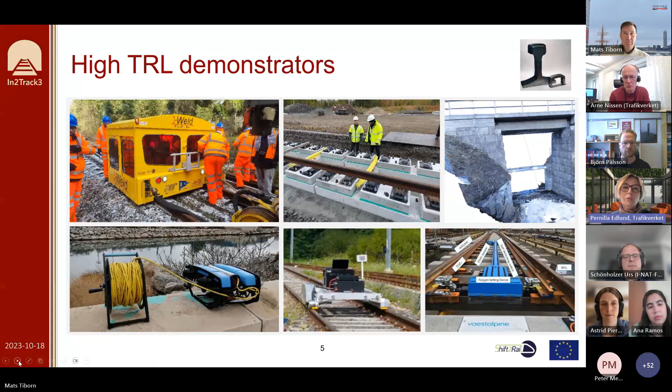This is just an illustration to show, and here are a few more of the demonstrators that we have. As I said, we have 30 of those at high TRL levels, which are very interesting to learn more about. If you want to learn more, you can join our final event on November 30th. It's a hybrid event, a whole day event, but divided into blocks. You will find the detailed program at in2track3.com, where you can also see the blocks themselves and the specific topics and speakers.

So you know that this is something that really interests me. Okay, I'll join between 11 and 12 or whatever. So very welcome to register and to participate in that event.

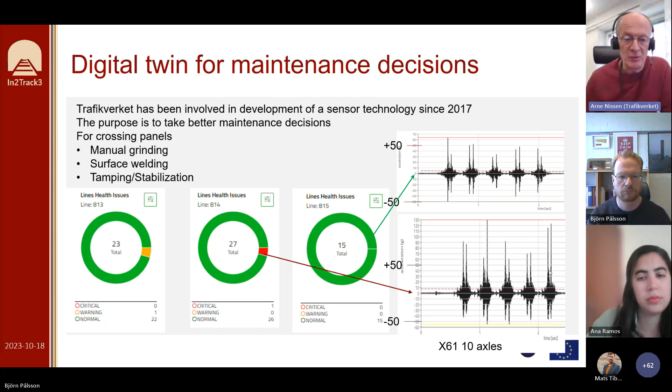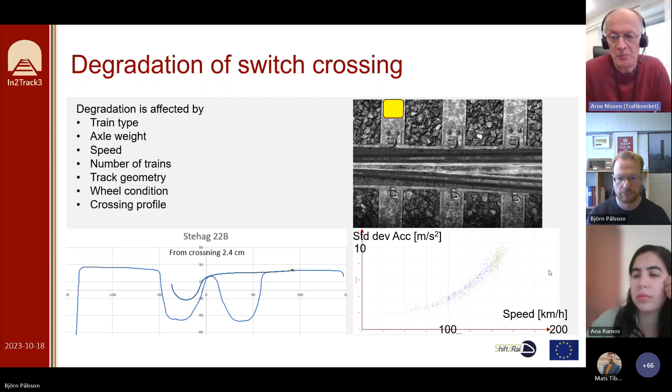Thank you very much, Arne. So at Chalmers University of Technology, we have been performing independent research on this instrumentation concept. We are using raw data from commercial sensors, but we do our own analysis using a digital twin concept. We're working with something we call model-based condition monitoring.

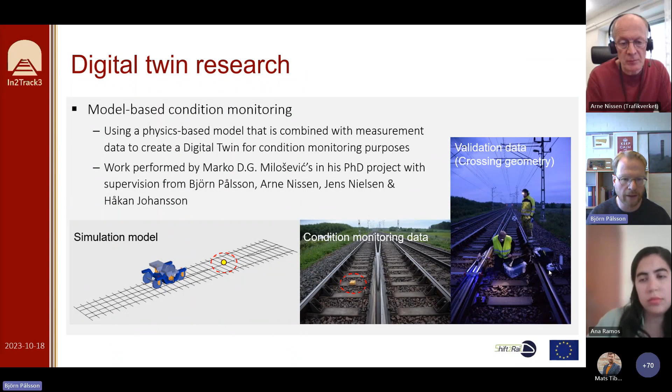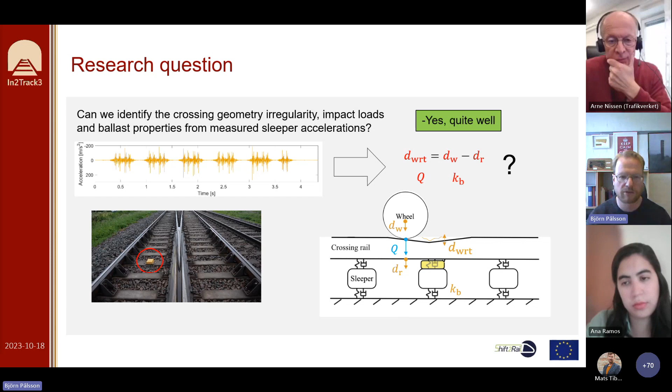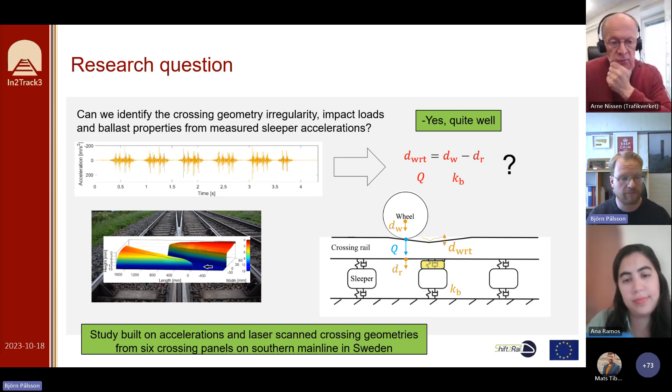To go into some more detail of the identification scheme itself, it's built on 6 steps. It starts with the measurement of the sleeper accelerations as shown before. Then Marko has developed a method for frequency domain integration, to integrate the accelerations twice into sleeper displacements. He chose this frequency domain integration because it showed to be much more robust than the typical impulse response filters.

Once we know the sleeper displacement, we can calibrate the ballast stiffness in the multi-body simulation model, and we have then identified the ballast stiffness at the particular crossing panel.

Using this calibrated model where we know the track properties, we assume that the superstructure has fairly nominal properties, so we don't expect the pad stiffnesses or sleeper and crossing stiffnesses to change much over time.

It's predominantly the ballast stiffness that has local variations. So with that assumption, we can perform an inverse load identification using a Green's function approach.

So we essentially take the sensor response and compute the wheel rail contact forces from the structural response. Knowing the forces, we can estimate the wheel and rail displacement and also then their relative displacement.

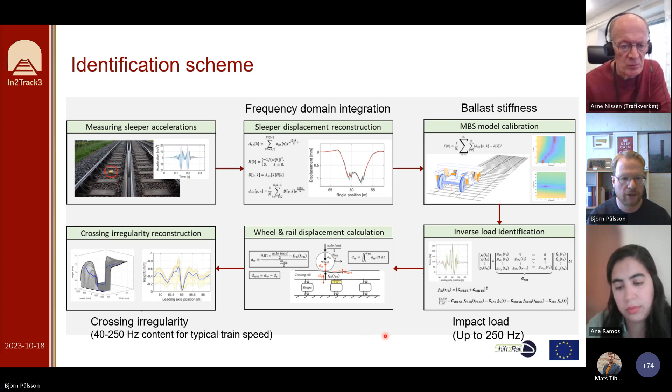So here is just an example of the ballast property identification for these 6 crossing panels. Marco has calibrated the ballast properties under the crossing, and we can do this independently of the crossing geometry.

So we are looking at the low pass filtered frequency and the quasi-static response, so to speak. We don't need to know the actual status of the crossing geometry in order to do this. So the result is independent of the quality of the crossing geometry.

So we have a parameterization of the ballast stiffness underneath the crossing transition, and here are just 6 examples of identified ballast stiffnesses. We see that for 5 of the crossing panels, we have an identified stiffness. But for the 6th, the stiffness is essentially 0, which would then indicate a voided sleeper.

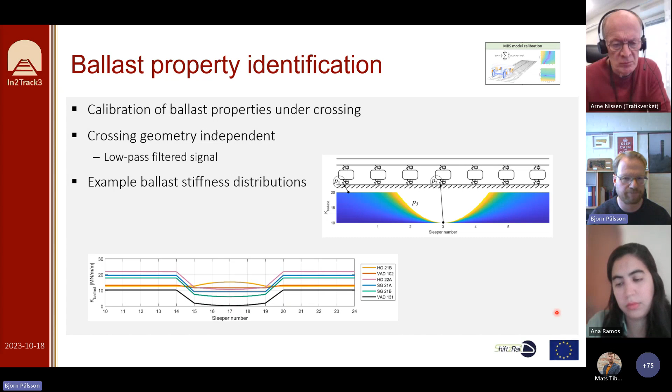And in this case, we had a sleeper displacement of around 6 millimeters, so it should definitely be voided. So that's the ballast stiffness identification.

And then we go further to look at the force and crossing irregularity identification. So here I have a number of figures. In the top row, we see results for identified responses from sleeper accelerations for a sample of axle passages.

So it's 48 in this case, I think. And below, we have simulated responses from where we have implemented these scanned crossing geometries and calibrated the ballast properties. And here we have used 20 different wheel profiles.

So as we don't know what wheel profiles are passing the actual sensor, we compare on a sort of sample basis. And then the responses we are looking at are the sleeper displacement for a bogie passage.

And it's the wheel rail contact force and the crossing dip or irregularity for the leading axle. And as we can see, the response is very good for the sleeper displacement.

It's more variable naturally for the wheel rail contact force and for the crossing dip. But if we look at the overall trend as identified here with the dominant mode in a singular value decomposition,

it's not so, the method is not so important, that we have identified sort of the dominant trend in all these repeated signals. We can see that there's quite a good agreement.

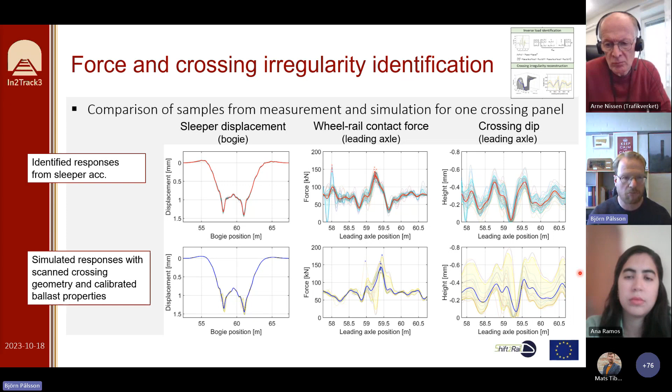But if we look down on all 6 of the crossing panels, we think that there is overall good agreement, but there is more variability for some crossing panels than others.

And the reason for that, we think, is that we have both uncertainty due to the wheel profile samples. We don't know exactly what wheel profiles are passing, and also the length of the scanned crossings.

So we only have a few meters of scan, which means that we don't know the full excitation in the real crossing panel.

So one would hope that the measurements would give the true answer, and partly it does, but without getting even more field data and a more detailed description of the actual measurement location, it's difficult to make

a strict comparison. But yeah, what I just wanted to highlight are 2 examples of a better crossing geometry and a worse crossing geometry.

So if we look at this crossing geometry, for example, Vad 102, and we can see in the green dashed framed figure here, we see this crossing irregularity dip or irregularity as

a wheel rolls over the crossing. So this is the vertical trajectory of the wheel as it rolls over, and we can see that it doesn't have a very large amplitude.

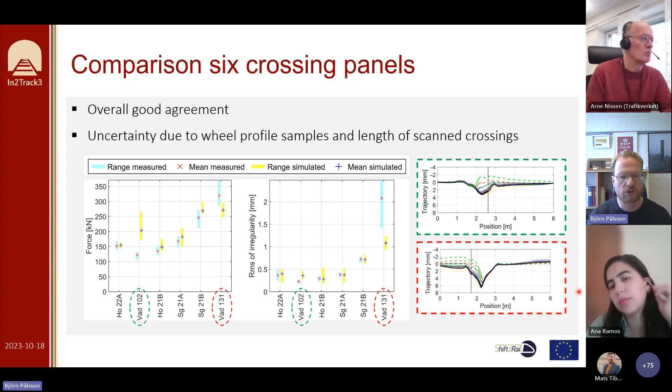So that was it in terms of the digital twin and condition monitoring. I wanted to give one slide on another thing we've been working on in In2Track3, the so-called whole system model. It's a simulation scheme that accounts for the coupling between different damage mechanisms, so we can make a holistic assessment of a crossing panel design and see how design changes influence different damage modes, and estimate the damage evolution of a crossing panel over time.

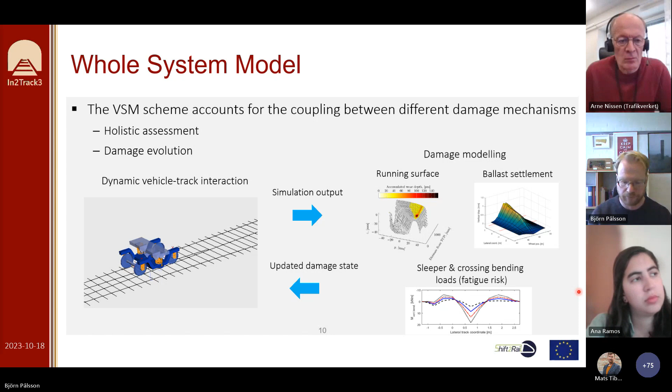So conclusions in terms of condition monitoring: we have demonstrated a model-based, or digital twin, crossing panel condition monitoring scheme to identify the ballast and crossing geometry conditions. We've shown that it's possible to identify with some accuracy the ballast stiffness, the wheel-rail contact forces, and the crossing irregularity dip in a bandpass filtered region.

In terms of commercial interest, I know there's implementation interest from commercial actors, especially for the displacement reconstruction algorithm. Some of the results here are yet to be published, so we have to see how much interest there is from that.

Also in terms of practical implementation, we want to stress that these models for the different ballast properties can be pre-computed for a computationally efficient implementation. So it's more about picking the model with the right ballast properties in order to perform the load and irregularity identification. It should be possible to do this online.

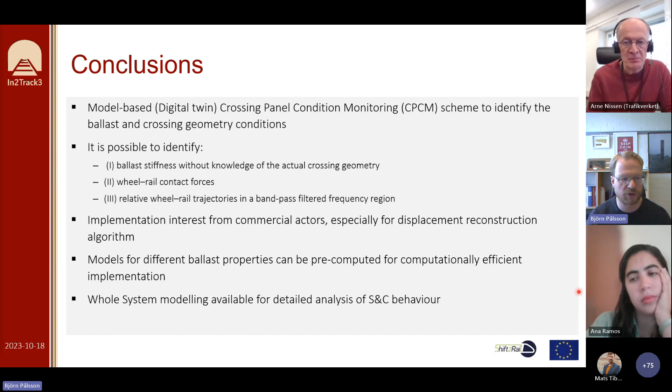I just wanted to say we have this whole system modeling scheme as well. As for publications, I will put them in the chat. Then I leave the word to Arne.

Yes, I'll take a few minutes. When we work as a manager for the maintenance contracts, having outsourced all the maintenance, it is a challenge to know when to do things and how we should be able to control what is done.

Today, very much is done on inspection, or that we get faults in the track geometry. What I see is that the visual inspection or the track geometry does not give the information I want in order to do good preventive maintenance. Then we can ask the question, is this the right method?

Should we put out more sensors? My view is we could do the same thing with trains that measure the acceleration, but it's even more difficult than what we have started. So by learning from one method, we can implement other methods to gain the same information.

What we actually want is to take decisions much earlier, because today we decide what to do within a frame of 2 or 3 months. It should be possible to at least have the knowledge 6 months before. So I want to head for more proactive decisions, which means the planning horizon for maintenance can increase.

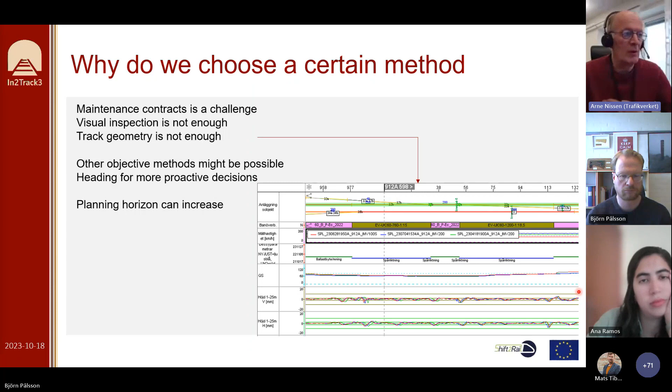Next picture, please. Going back to what we intentionally wanted was to divide the different maintenance actions depending on what the signal says, not just green, yellow, and red. I think Björn has shown that we can be more precise about what maintenance is needed. I talk about failure modes as a general term — if we can identify the failure mode, we can also instruct what type of maintenance is needed.

And the last thing is, when we are done with the maintenance, it should be possible for us to see that the condition is good again, so we can check this maintenance did the work we wanted. So that's all for me. Thank you.

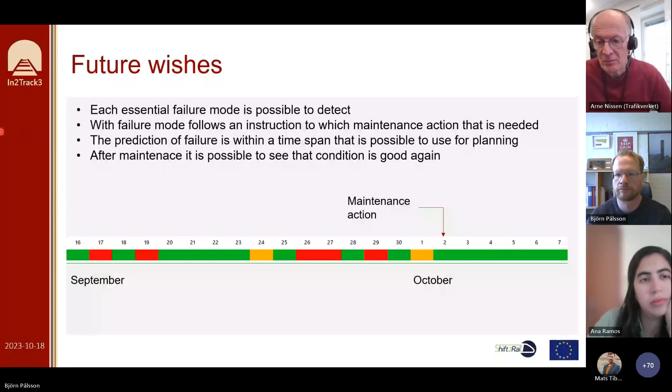Thank you very much, Björn and Arne. Actually, could we take one question that I see in the chat right now? What would be the value of sensor and data fusion from a large number of onboard sensors and accelerometers?

We have a project called MAI within Trafikverket that will take information from accelerometers on board trains. It has not been suited for turnouts, but we will use that information and see if we can succeed. That's actually what I wanted to say — it's possible to measure this from the train.

I think so. Okay, so thank you very much. And if you have more questions for Björn and Arne, please ask them in the chat, and they will try to answer as well as possible there, or guide you further to read if they have information elsewhere.

So next up is the track design and track maintenance guidelines to reduce curve squeal, with Astrid Piringer from Chalmers University of Technology and Urs Schönholzer at the Swiss Infrastructure Manager SBB. Welcome. Good afternoon, I hope you can hear me.

My name is Astrid Piringer, and I'm working at Applied Acoustics at Chalmers University of Technology in Sweden. I would like to present the work that we did about curve squeal in In2Track3. The long-term goal of this work is to provide guidelines for track design and track maintenance to reduce curve squeal.

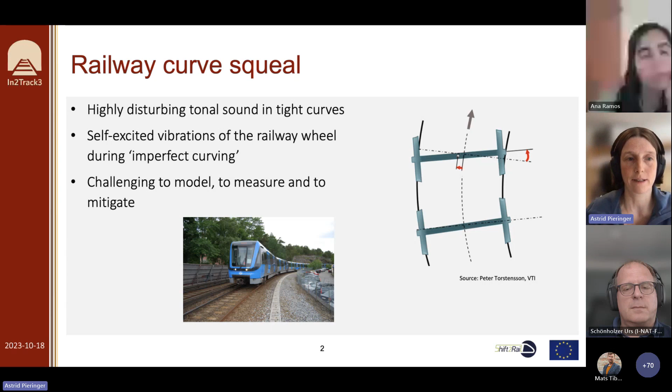Squeal is in many ways challenging. It's challenging to model because it's nonlinear and transient and depends on many different parameters. It's also challenging to measure because it appears rather chaotic than deterministic, and depends on environmental variables such as temperature and humidity that change from day to day or even hour to hour. It's also challenging to mitigate because measures work in one situation but not in another. So there's a lot we still don't know about curve squeal.

So the agenda of my contribution is: I will shortly present our model and how we improved it during In2Track3. Then I will talk about the influence of rail grinding on curve squeal, which actually showed to have a significant influence. And at the end I will present some first results about the influence of rail pad stiffness.

It includes a flexible wheel model, a waveguide finite element model of the rail that is either continuously or discretely supported, and a detailed contact model based on Kalker's variational method. We use a Green's function approach to solve these three models together, which leads to high computational efficiency.

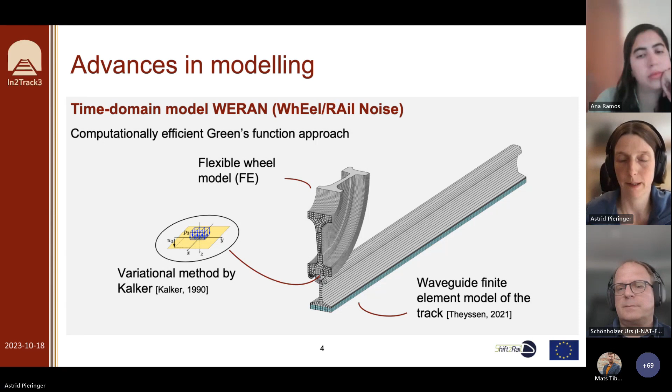Then in In2Track3, we extended this model to transient curving. Previously we could only consider quasi-static curving, but now we can consider that the contact position changes during curving, and also a varying creepage, which is the sliding velocity normalized by the rolling velocity, and other varying parameters such as the friction coefficient. I would like to show one result from such a simulation, which is a purely theoretical result, but it still gives some insight into the phenomenon of squeal.

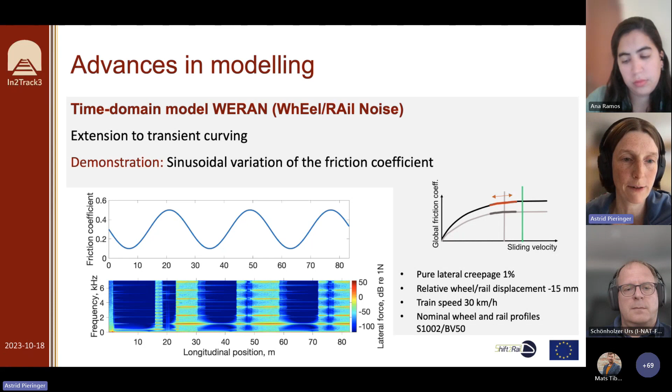What we've also done in In2Track3 is combine our model for high frequency wheel-rail interaction with a model for low frequency vehicle track interaction, using the commercial software Simpack. We first used Simpack to calculate the low frequency vehicle track interaction for a certain vehicle configuration, track geometry, and train speed. This gives us the time series of contact positions and creepages, which we then use in WERAN to get the time series of contact forces and wheel and rail displacements. We could also calculate the sound pressure next to the track, but we haven't done this in this project.

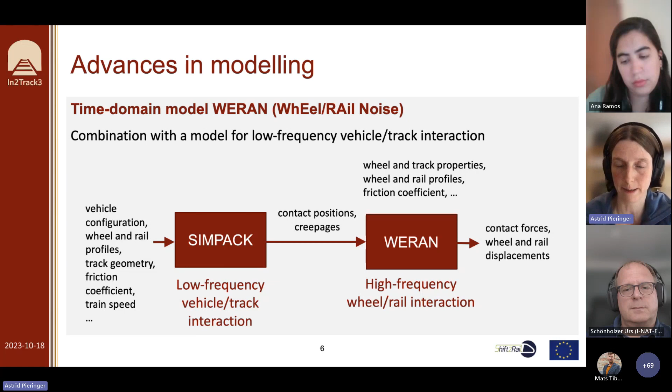Okay, that was the model. Now I will move on to the influence of rail grinding. There I would like to present some results from measurements, which are actually from outside In2Track3, from a national project about curve squeal.

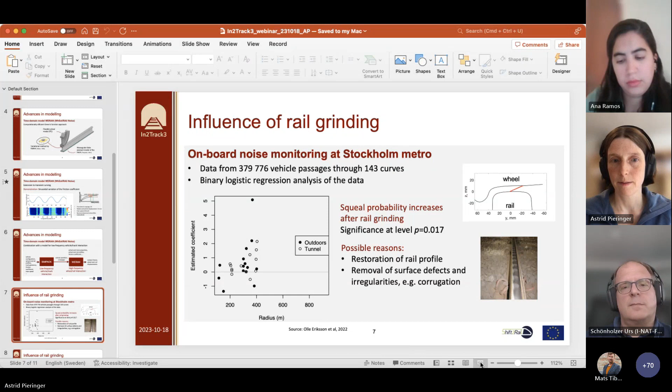Thank you. Okay, so the results I would like to show now are from onboard noise monitoring at Stockholm Metro. This study has been carried out mainly by Olle Eriksson and Peter Torstensson from the Swedish National Road and Transport Research Institute, VTI.

We had microphones close to the two wheels in a wheel set on several vehicles, and we have had a lot of data, from almost 400,000 vehicle passages through 143 curves. We've done a binary logistic regression analysis of the data to see the influence of different variables on curve squeal, one of them being rail grinding.

So in the plot below, you see the results of this for rail grinding. Each of the dots is one curve that has been ground during the period of observation. We've compared the probability to squeal before, so in the months and weeks before grinding, and after grinding. You also see different curve radii for the curves.

The coefficient on the y-axis tells us whether the squeal probability increases or not after rail grinding. If this coefficient is bigger than 0, the probability increases. For most of the curves, we had a higher squeal probability after rail grinding, and this was a significant result. The data does not tell us why this happens.

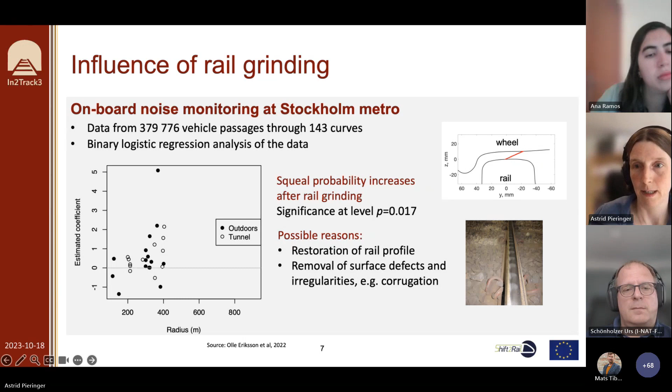We would have liked to replicate these results by simulations, but for that we would have needed a lot of measured rail profiles from these curves before and after grinding, which we didn't have. Instead, since we know that different rail profiles will influence where we get the contact on the wheel and rail, we vary the lateral contact position manually in the simulations.

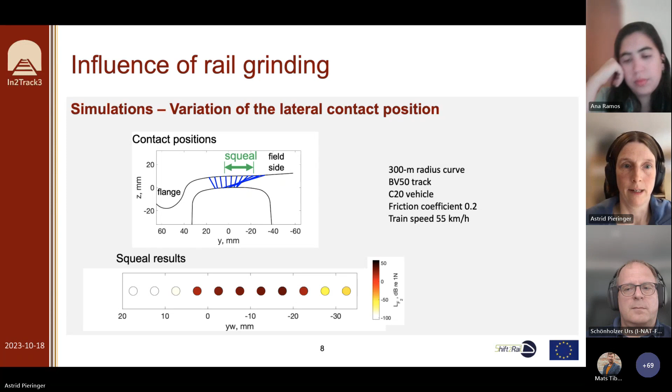Then finally, the last part on rail pad stiffness. There we have done a rather small parameter study with a discretely supported rail that had a rail pad between the rail and the sleeper with different stiffnesses. We had a very soft pad with 41 meganewton per meter stiffness, a medium pad at 400 meganewton per meter, and a stiff pad at 800 meganewton per meter.

The blue curves show the contact force spectrum for the different pads, and the red broken curves are a reference curve that shows what we get if we block the squeal mechanism and only have excitation on the discretely supported rail. When you compare the different cases and look at the main peak, the main peak for the soft pad is about 10 dB below the medium and stiff pad, which would mean a lower squeal amplitude. But as this parameter study was rather small, I would not generalize this result for now. I think we need further investigations to state how rail pad stiffness influences squeal.

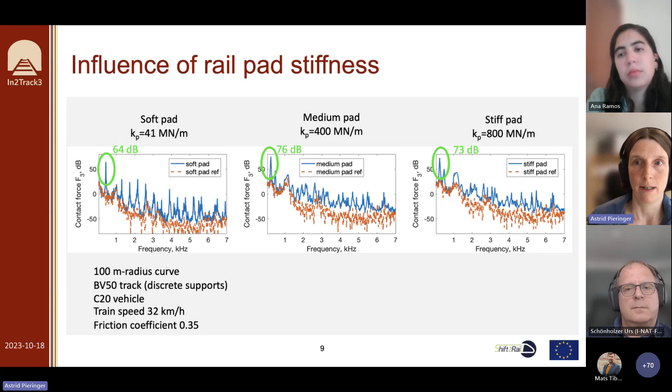So I come to my conclusions. We have a state-of-the-art tool that can readily be used to investigate realistic curving scenarios with regard to squeal occurrence and amplitudes. With this tool, we have demonstrated there's a certain range of contact positions on the wheel tread that leads to squeal. With this knowledge, we could develop mitigation methods if we manage to move the contact positions outside this squeal range.

I showed the influence of rail grinding on squeal, but we have to do further investigations to explain what is the reason behind it. We also need larger parameter studies to study the influence of track parameters such as rail pad stiffness. This work will continue in a national project funded by Trafikverket, with the aim to, in the long term, provide track design and maintenance recommendations for reduced squeal occurrence. So, yeah, thank you for listening.

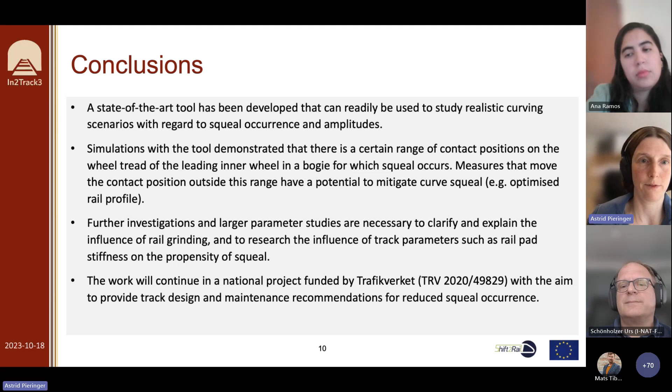I hope you can see my screen. It is my pleasure to show you the view of an infrastructure manager on curve squeal. I start with a few application cases that we have, then the legal framework that we're in, and then I'll tell you how we are going to apply the results.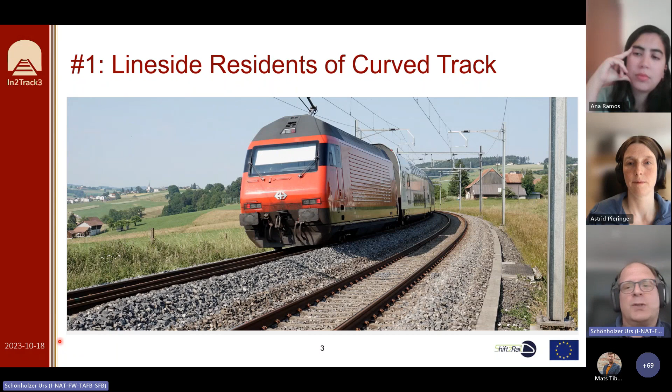And people complain very heavily about the squealing noise that we have here. Here we try to reduce this with some friction modifier systems to at least keep the problem at bay to some level.

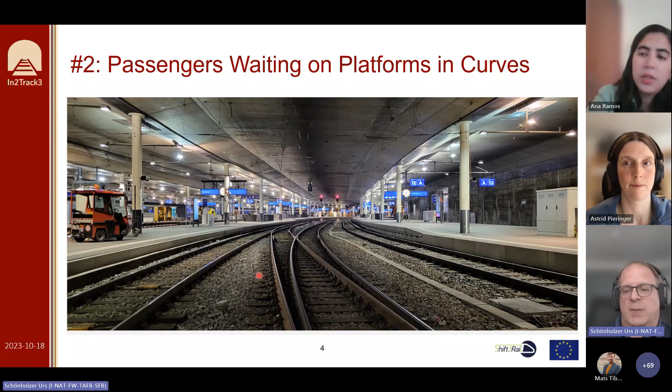We have quite a strong regulatory framework when it comes to track design. We have track layout standards, European standards, and in the case of Switzerland, we even have some of the values for track design implemented in law, so they are really hard to change.

Often track design is based on a so-called design speed, and maybe the majority of the trains are substantially slower. This can then lead to non-ideal contact parameters between the wheel and the rail.

We also see this very often when we have passenger lines in the vicinity of stations. So the calculated track geometry is always made with a train in mind that goes through that station without stopping. This might be one or two maintenance trains a year, and all the other trains are stopping. This creates a little bit of an offset, where the intended use of the track by the trains is not what the actual use really is.

For us as an infrastructure manager, it's also a very tough situation that we don't know who's going to use our tracks. We have the TSIs, we have open access. So it might be that someone with a high-speed train wants to reach a village with very tight curves. It's technically possible. Whether it's a good idea is another question, but it has to be possible to reach all the stations, and this can also lead to quite significant problems with squeal that we have with only certain fleets circulating on a line.

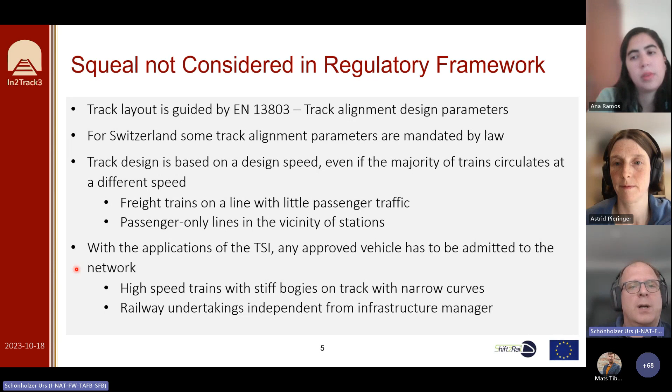Also as an infrastructure manager, it's not possible to mandate certain wheel-rail contact parameters from the railway undertakings at the moment. That is why we are very keen on having guidelines that we can prove. So we need to know the exact correlation and the dependencies of track design and maintenance.

We can influence that, for example, by changing the cant or correcting the gauge. We also have to know the effects on the wheel-rail geometry. Vehicle design and maintenance also has an effect, as do the friction modifiers. We need to have a really good understanding, and we need to quantify all these influences to match what I showed in the previous slide.

We have a lot of regulation from the theoretical side, and that never takes into account noise. So we need to counterbalance that with a similar knowledge of what all these parameters and factors, and their influence on the noise, especially squeal generation.

Urs? Yes. Can you finish in a few seconds? You think? I know this is your last slide because the next presenter needs to come in. Yep, I'll do that. And how do we do that?

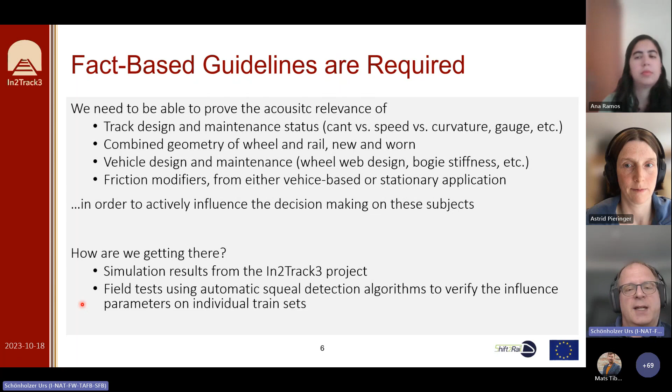We use the simulation results that we have seen here presented by Astrid, and we match that with the field tests to see if these results are really giving us the actual input that we are looking for.

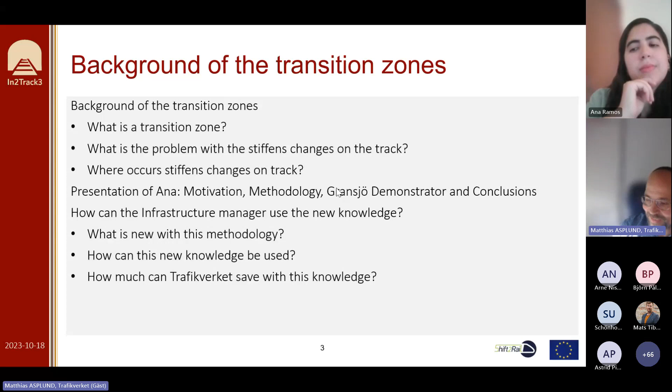Transition zone: when we have this change in the stiffness of track and you have the same axle load, you will have vertical deflections on track that will be different, leading to different settlements in the longer term. In this picture, I'll show you the idea of these transition zones. If you have, for instance, a car, you have the free track and you have a bridge, and you'll have a point in between the free track and the bridge.

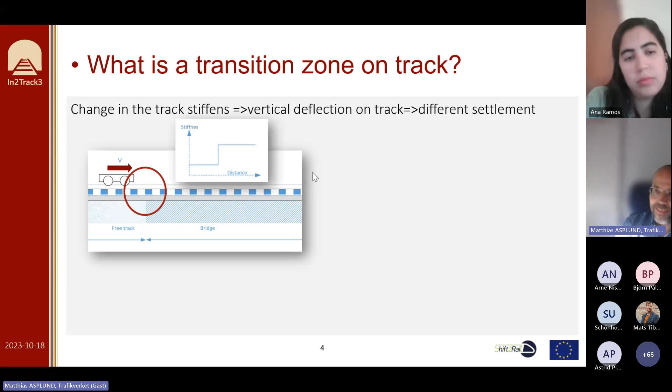There is some type of change in the stiffness, and this is more or less a step change. Step changes are not good because they give a lot of dynamics in the vehicle, and this could be improved by having a transition zone instead, with a smoother transition in between the stiffnesses.

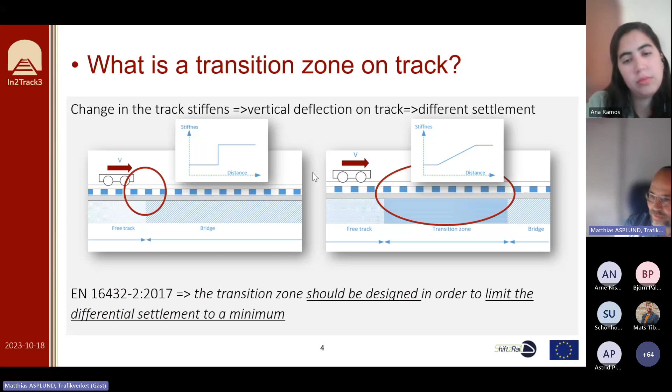There is also a European standard that deals a little with this and mentions that you should have this transition zone so that the settlement in the long term will be minimized. And yeah, what's the problem?

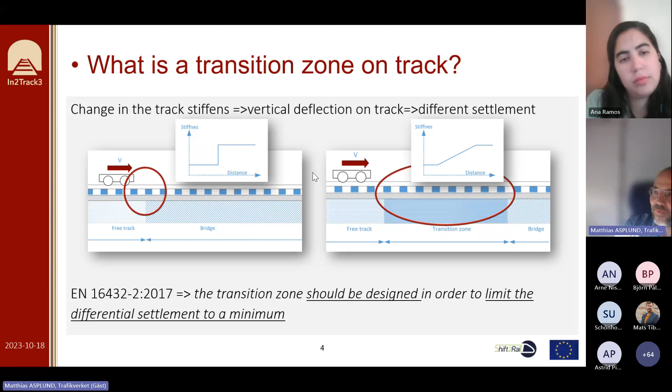I think you already have a feeling of the problem, because when we have this fast change in stiffness, we will have vertical deflection in the track, since you're passing a zone with different stiffness. This gives dynamic motion to the vehicle, and these motions create forces that the track needs to take care of, and these forces will lead in the long term to more degradation than expected on track, which leads to maintenance actions.

And if you go out and need track access for these maintenance actions, the maintenance actions usually consume capacity from the operation. You can't have operation during those times. Of course, you can do maintenance in the night times where there's no operation, but sometimes you need to do it when you could otherwise have operations.

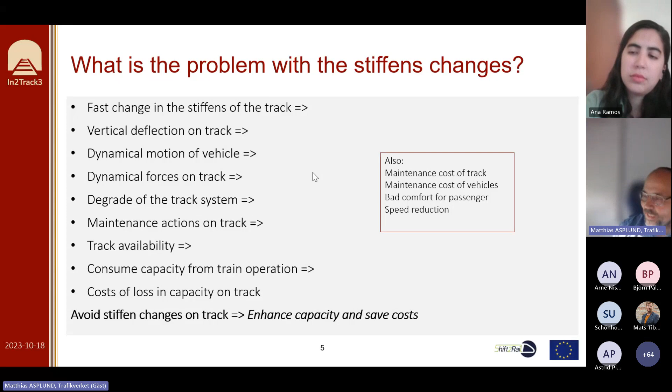This will cost in the loss of capacity, and you should avoid different stiffness changes to enhance the capacity and save cost on track. There is also maintenance cost of track, maintenance cost of vehicle, and societal cost like speed reduction, and passengers feeling bad comfort.

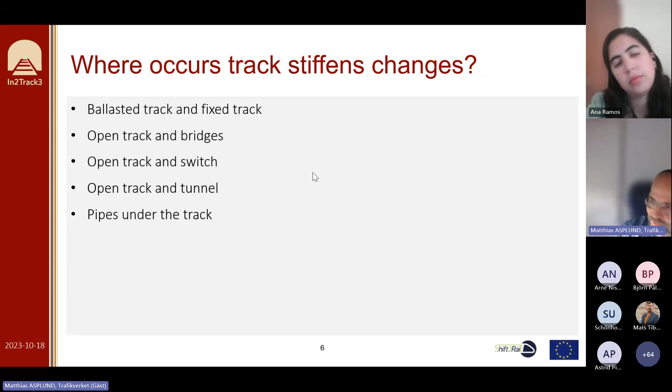And where do we find this? We find this in ballast and fixed track, in between open track and bridges, open track and switches, open track and tunnels, and for instance even where you have these pipes.

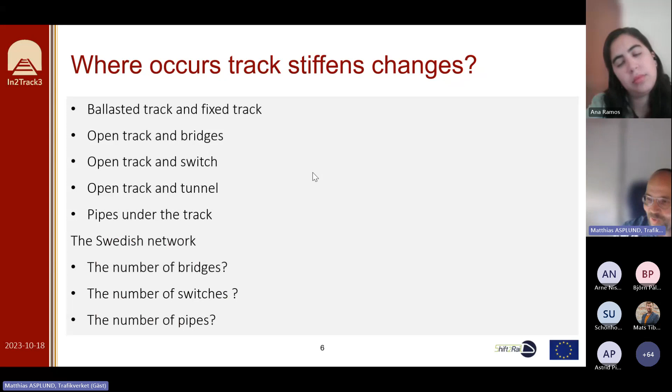And how many bridges do we have in Sweden, and how many switches and pipes do we have? If I account all these together, I think I get 60,000 different areas where we have a change in stiffness. Of course, not all of these are hot spots, but these are spots.

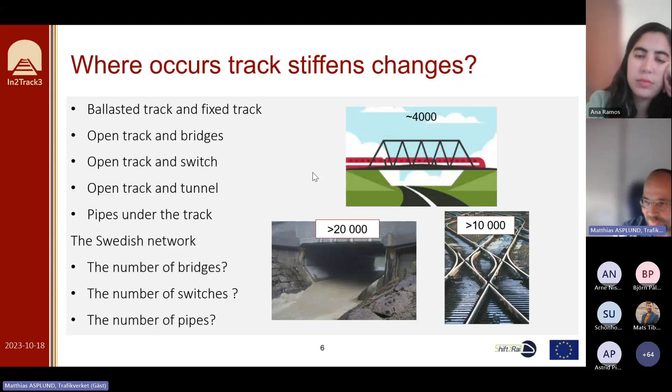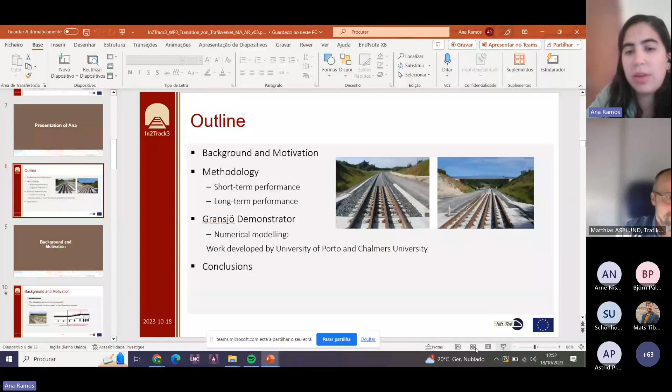Please, Ana, you need to unmute. Sorry, I will share my screen. So, okay, moving on with the presentation.

Are you seeing my screen? Yes? Yes, we do. Yes, okay.

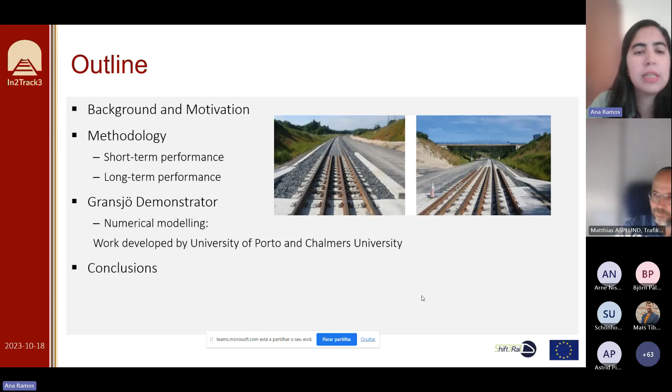So I will talk a little about our motivation to do this work, some slides about the methodology, short-term and long-term performance, some aspects regarding the numerical modeling related to the demonstrator. This is work developed by University of Porto and Chalmers University, and also some conclusions considering this developed work. So regarding motivation, Matthias already presented.

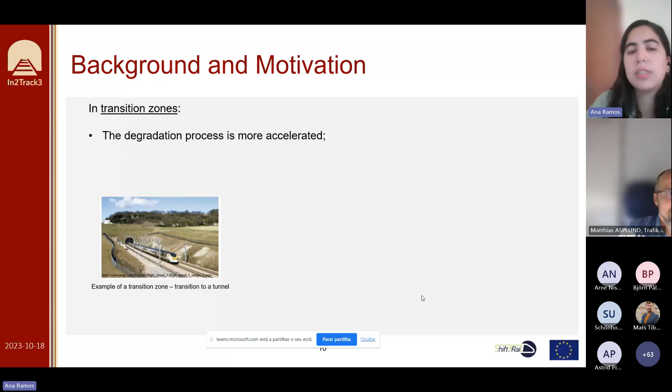So here in transition zones, the degradation process is more accelerated. This is a problem in the railway network, and there are serious problems related to differential settlements because of the difference in stiffness of the structures.

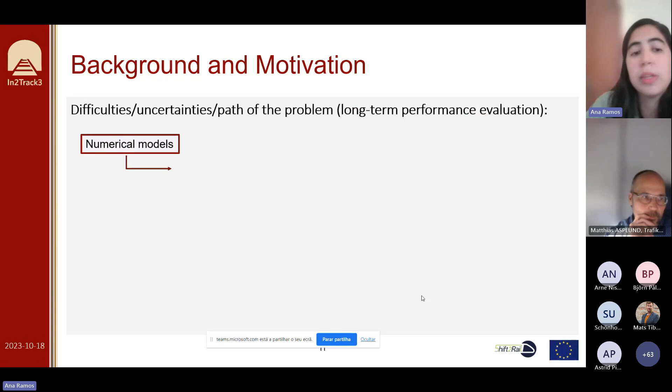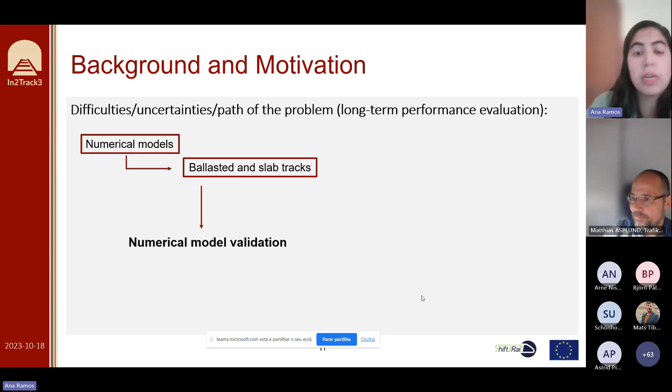So in the analysis of long-term performance evaluations, there are some difficulties or uncertainties in our analysis. We should start with numerical models of ballasted and slab tracks, and it's important to do a numerical model validation in order to gain confidence in our ballasted track or slab track models, before moving on to transition zones, because transition zones present very unpredictable behavior.

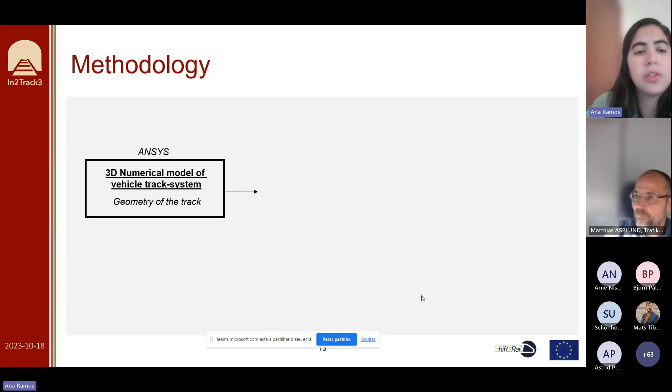So it is important to have confidence in our models in order to predict the long-term performance of railway structures. Regarding the methodology developed at the University of Porto, we have a 3D numerical model of the vehicle-track system, developed in ANSYS, which allows us to have an exact geometry of the track.

Based on this, we are able to perform the dynamic analysis with the vehicle-track interaction, considering contact elements between different layers. For example, for the ballast track, we can include contact elements between the ballast and the sleepers. Our main point is to obtain the stresses on the geomaterials of the track. Of course, we are also able to analyze displacement, strain, stress, and accelerations on the different layers or materials of our model.

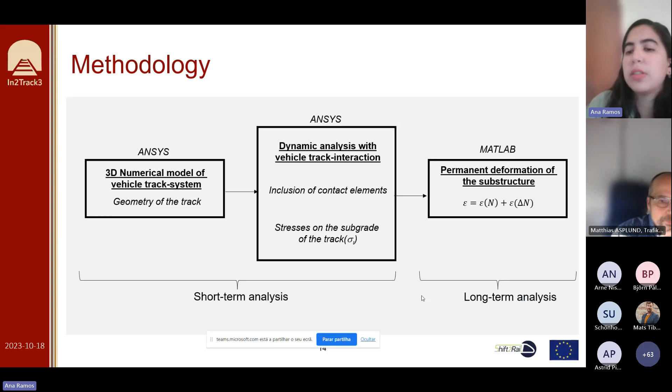But the main point for the long-term performance is to obtain the stresses on the subgrade. So this is our short-term analysis, and based on the stresses of our dynamic analysis, we are able to predict the deformation of the substructure based on an empirical deformation model that I show here.

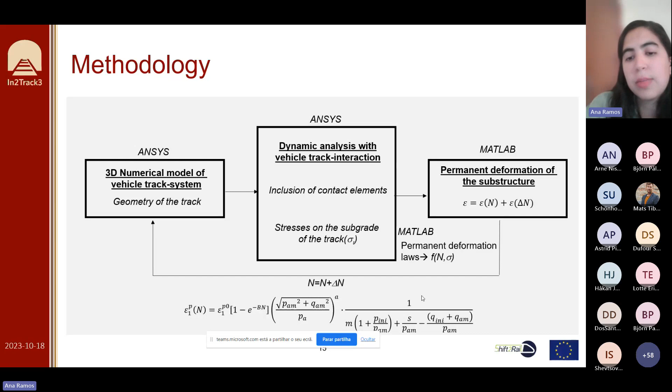This is an example of this type of model developed in laboratory, dependent on the stress state of the geomaterials, the initial stress state, and also the stresses induced in the geomaterials by the passage of the train. From this deformation model, we obtain a permanent settlement that can again be introduced in our 3D numerical model. From this point, we have a deformed track, meaning we are able to analyze the joint effect of differential settlements and track degradation.

Here is an example of the application of this methodology. This is a transition between an embankment and a tunnel, considering a slab track system. We start with the stresses obtained in the 3D modeling at all nodes of the substructure.

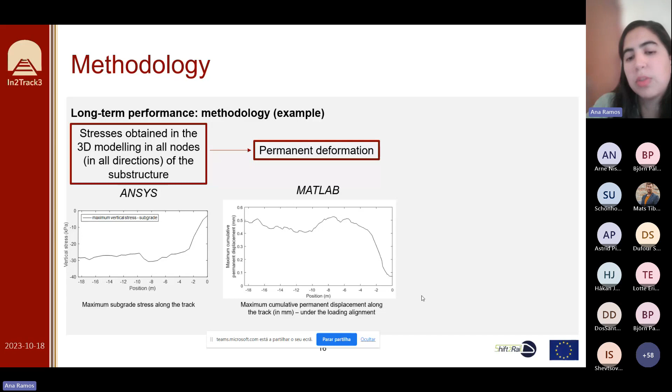This is an example of the variation of the maximum stress of the subgrade along the track. With this, we are able to predict the permanent deformation, and we can have a variation similar to this. This is the maximum cumulative permanent displacement, meaning the settlement accumulated along the track.

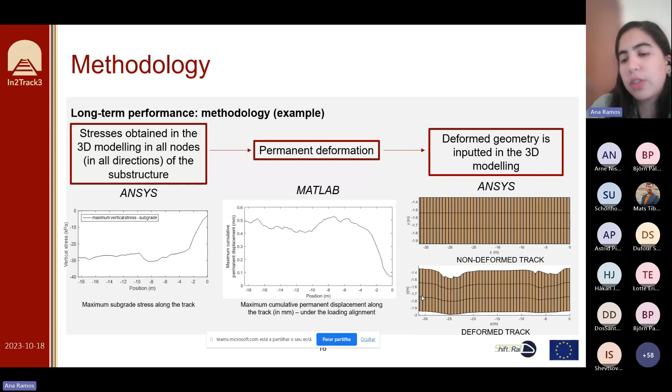From this point, we now have a deformed geometry that can be input again into the 3D modeling in order to simulate the track degradation. So we start with a non-deformed track, and now we have a deformed track in our 3D modeling, meaning we will have higher stress, higher train-track interaction forces, higher accelerations, and so on.

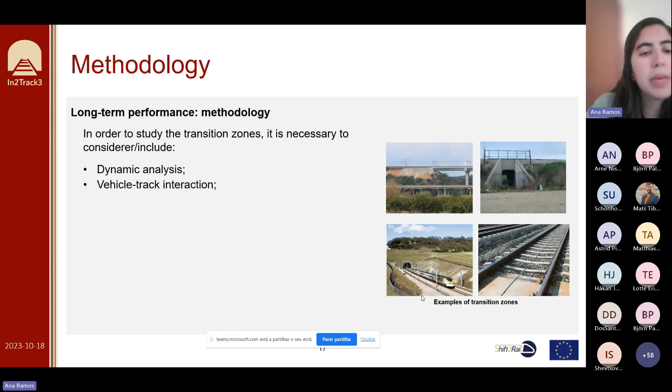From our point of view, in the analysis of long-term performance, the methodology should include dynamic analysis, vehicle-track interaction, and complete 3D models of the track. The simple 2D models are incapable because they cannot simulate the train load distribution.

Of course, we can tune our 2D models, and I will show the work developed by Chalmers. Of course, the 2D models are faster than the 3D because of the analysis time, and the 2.5D models are not an option in this type of analysis.

So from our point of view, the short-term but also the long-term performance are mandatory and should be analyzed together. And of course, we need to calibrate or validate our model, because the transition zones present a very unpredictable behavior, as I said previously.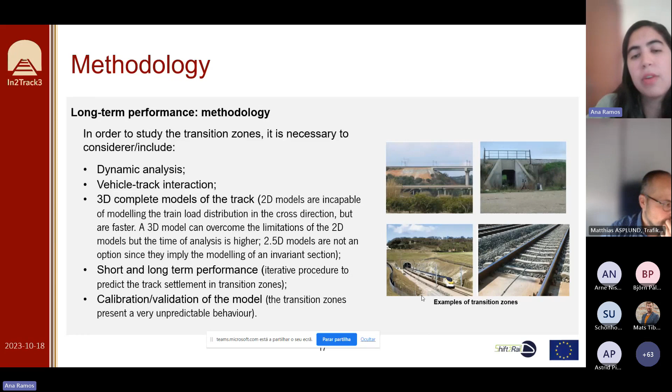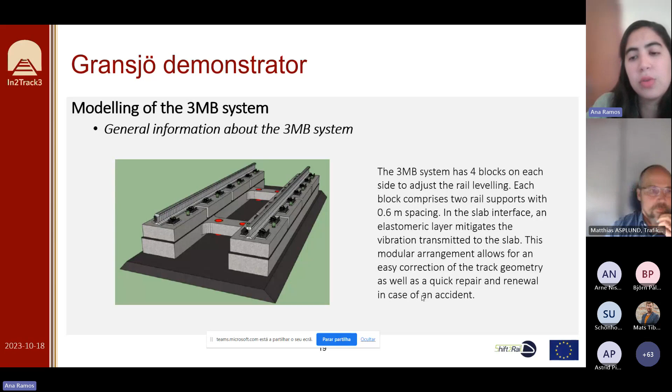So regarding the demonstrator in Sweden, some of you know about this demonstrator. This is a transition between a ballasted track and the 3MB system. This system is a modular system with 4 blocks on each side, as you can see in this figure, and each block comprises 2 rail supports. There is an elastomeric layer that allows mitigation of the vibration transmitted to the slab.

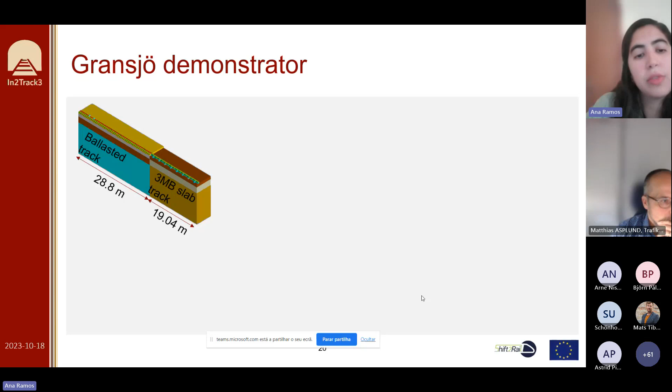So we start our analysis from developing our 3D model. Here we have our numerical model with a transition between a ballasted track and a 3MB slab track. Here is a detail of the developed model.

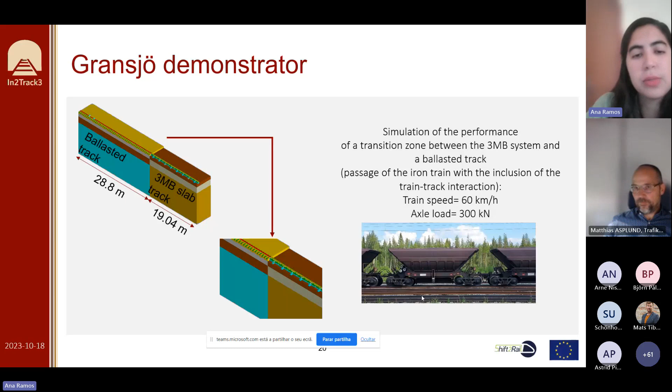We simulate the performance of a transition zone between the 3MB system and the ballasted track, considering the passage of this train, with a train speed of 60 kilometers per hour and an axle load close to 30 tons. So here we have the detail of the 3D model.

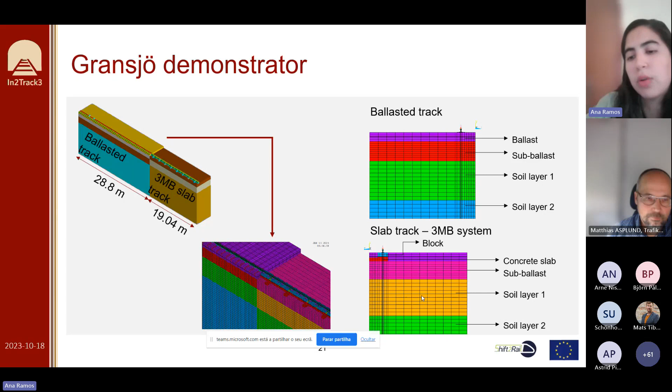For the ballasted track, we have ballast and the remaining soil layers. And for the 3MB system, we have the concrete slab, the sub-ballast, and the remaining soil layers.

This work is a collaboration between University of Porto and Chalmers University, working together to improve both models, considering measured experimental results. From Chalmers University, they are developing a nonlinear 2D track model based on an iterative approach to predict the long-term settlement in transitions.

The basic strategy is quite similar because at the end we are trying to simulate the track degradation, updating the track model, considering the settlements obtained. So from the 2D track model, they start with the initial track model, then apply a gravity load, and from this point they simulate the dynamic vehicle track interaction. This type of simulation is much faster than the 3D, so this is a main advantage.

For each sleeper, from the sleeper ballast contact force, which is one of the main inputs of this methodology, they are able to calculate the settlement increment and the accumulated settlement in order to update the track model and the threshold value in the settlement model, and start the analysis again.

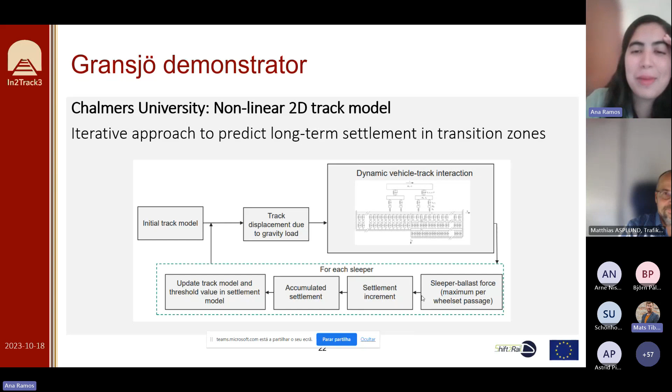Ana, yes, I'm very sorry, but we are running out of time. I will give you some more minutes. I thought I would have 10 minutes. I'm very sorry, but it's okay, no problem. I will try to go a few more minutes and try to wrap it up.

So we have here the short-term analysis, the results for the ballasted track side, a comparison between 3D, 2D, and the measured results. The 2D model is very close to the measured results for higher frequencies. For lower frequencies, the idea is to tune the 2D model based on the 3D because the coherence is low for lower frequencies. But you can see here that the results are quite good.

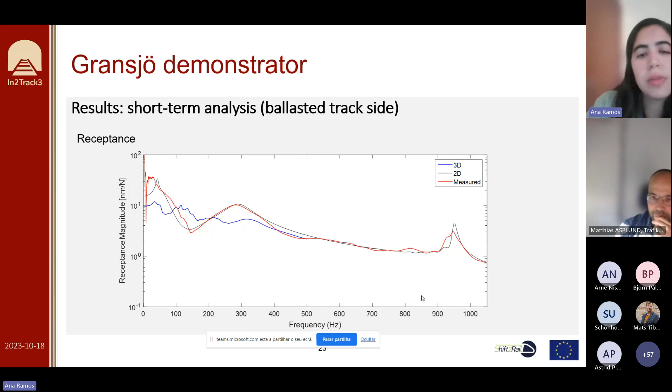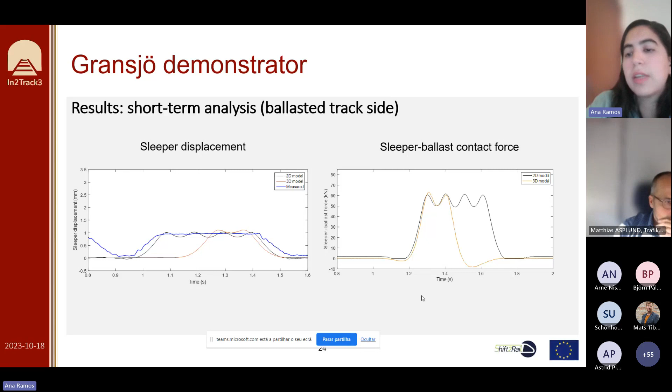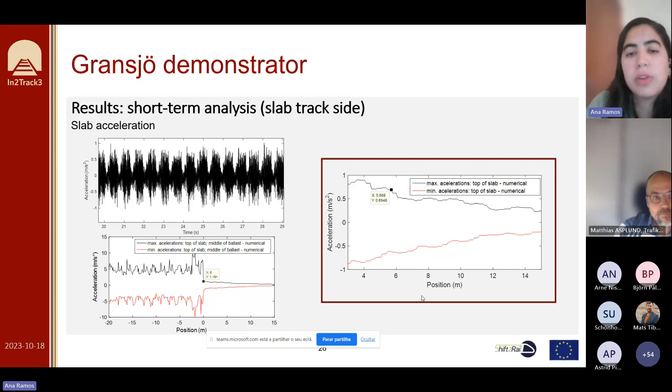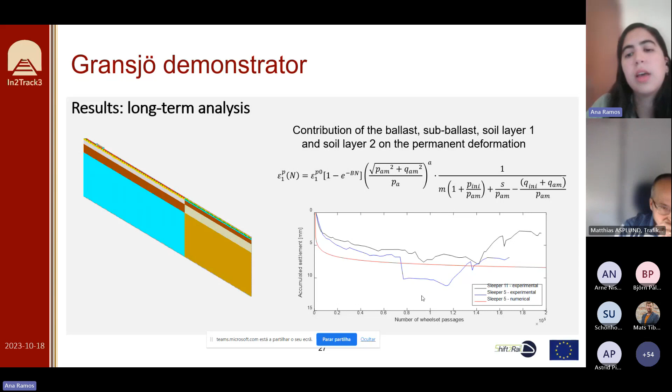From the long-term analysis, I selected a longitudinal section and predicted the permanent deformation considering the contribution of the geomaterials using this empirical permanent deformation model that I showed you previously. You can see here the experimental results for sleeper 11 and sleeper 5. Sleeper 5 is close to the transition. In the red curve, you have the numerical results for the accumulated settlement for sleeper 5, and the magnitude is very close. The curves are not overlaid, but the magnitude is close, which means the methodology can predict the long-term performance of the transition.

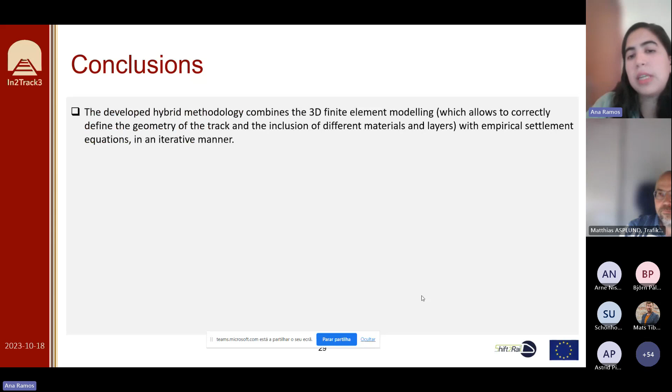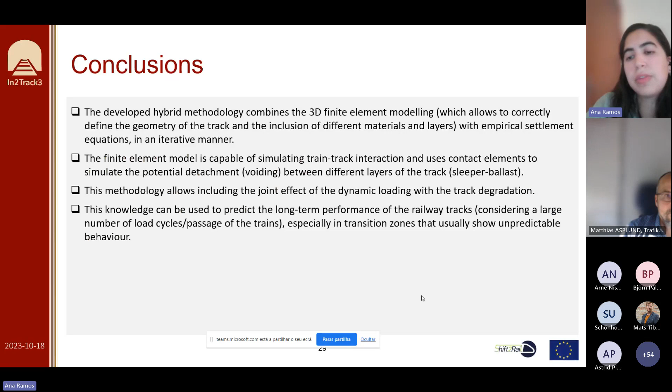So, very briefly, the conclusions show that the developed methodology combines the 3D model with empirical settlement. The FEM model is capable of simulating train track interaction and uses contact elements to simulate the voiding between different layers of the track, for example, sleeper-ballast for this case of the demonstrator. This methodology allows inclusion of the joint effect of dynamic loading with track degradation, and this knowledge can be used to predict the long-term performance of railway tracks, especially in transition zones, because, as I said previously, they show unpredictable behavior. Based on this, infrastructure railway managers are able to manage maintenance operations based on the predictions or simulations performed using this methodology in particular.